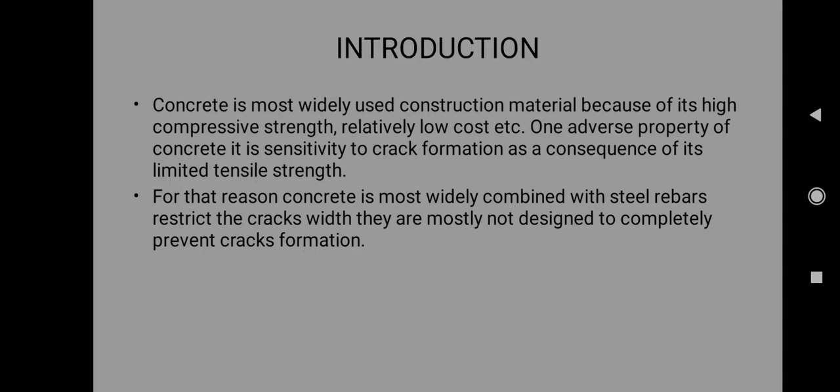Today I will discuss self-healing bacterial concrete. Concrete is the most widely used construction material because of its high compressive strength and relatively low cost. For that reason, concrete is most widely combined with steel rebars, which restrict the cracks but are mostly not designed to completely prevent crack formation.

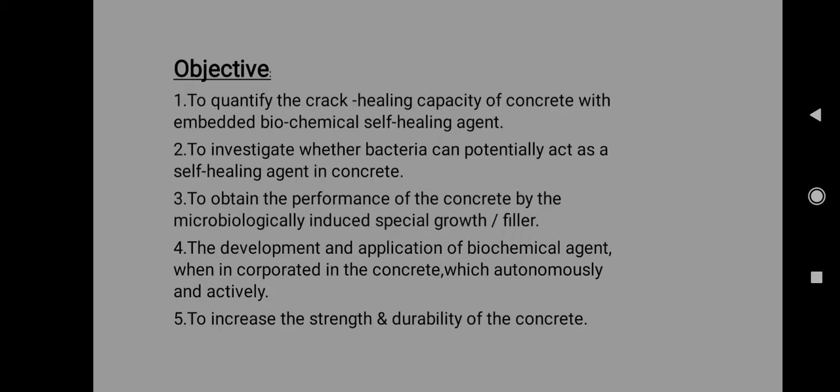The aim is to quantify the crack healing capacity of concrete with an embedded biochemical self-healing agent, and to investigate whether bacteria can potentially act as a self-healing agent in concrete. The development and application of a biochemical agent, when incorporated in concrete, autonomously and actively increases the strength and durability of concrete.

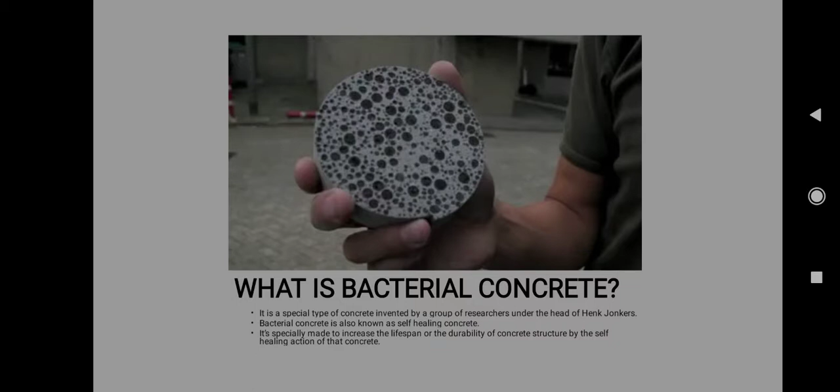What is bacterial concrete? It is a special type of concrete invented by a group of researchers under the head of Henk Jonkers. Bacterial concrete is also known as self-healing concrete. It's specially made to increase the lifespan or the durability of concrete structures by the self-healing action of that concrete. There are various bacteria used in the concrete, such as Bacillus pasteurii, Bacillus subtilis, etc.

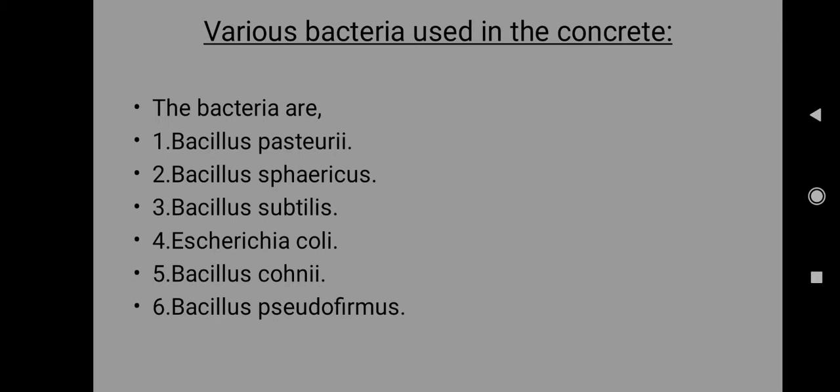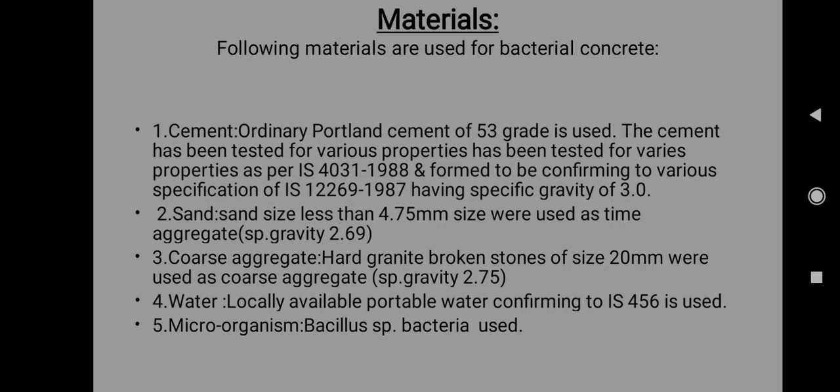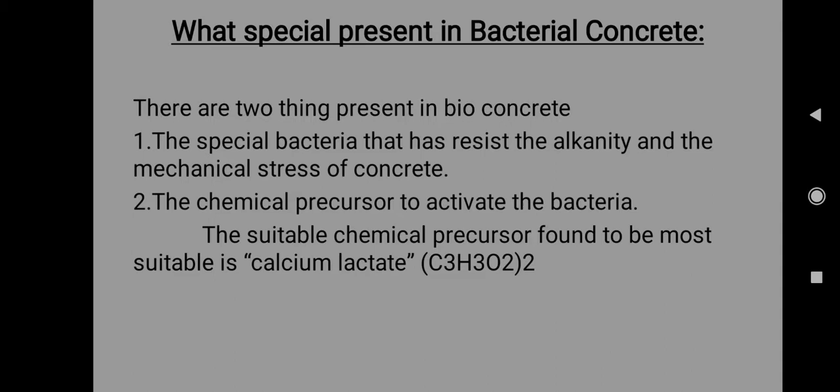The following materials are used for bacterial concrete: cement, sand, coarse aggregate, water, and microorganisms. What is special in bacterial concrete? There are two things present in bioconcrete: the special bacteria that resist the alkalinity and the mechanical stress of concrete, and the suitable chemical precursor, found to be most suitable, which is calcium lactate.

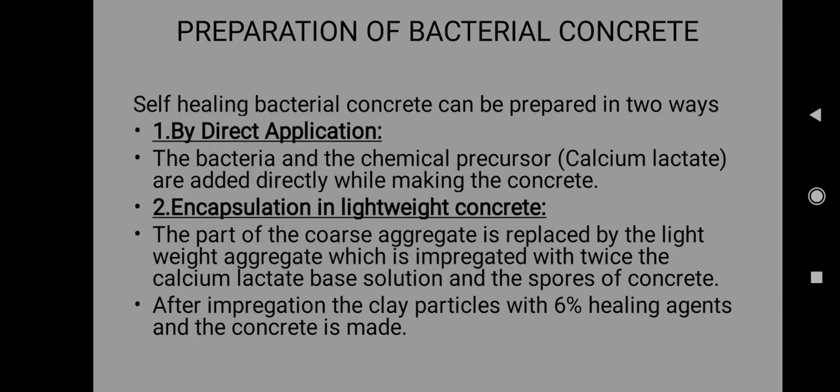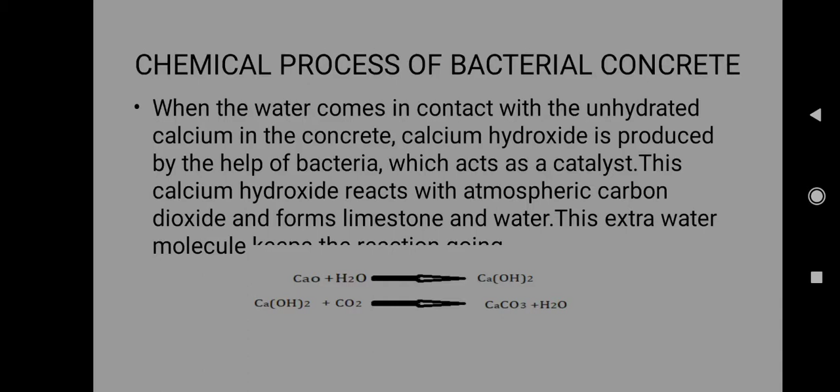Preparation of bacterial concrete. Self-healing bacterial concrete can be prepared in two ways: by direct application, and by encapsulation in lightweight concrete. Chemical process of bacterial concrete: when water comes in contact with the unhydrated calcium in the concrete, calcium hydroxide is produced with the help of bacteria, which act as a catalyst. This calcium hydroxide reacts with atmospheric carbon dioxide and forms limestone and water.

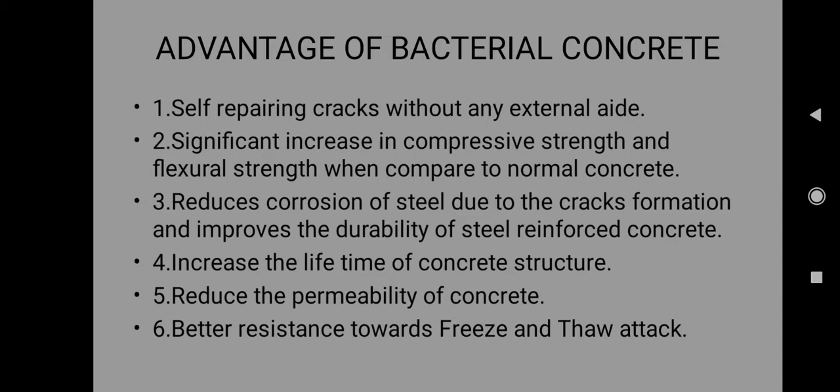Advantages of bacterial concrete: self-repairing cracks without any external aid, significant increase in compressive strength and flexural strength compared to normal concrete, reduced permeability of concrete, and better resistance towards freeze and thaw attack.

Disadvantages of bacterial concrete: the cost of bacterial concrete is double that of conventional concrete. Growth of bacteria is not good in every atmosphere and media. For the mix design of concrete with bacteria, there is no IS code or other code available.

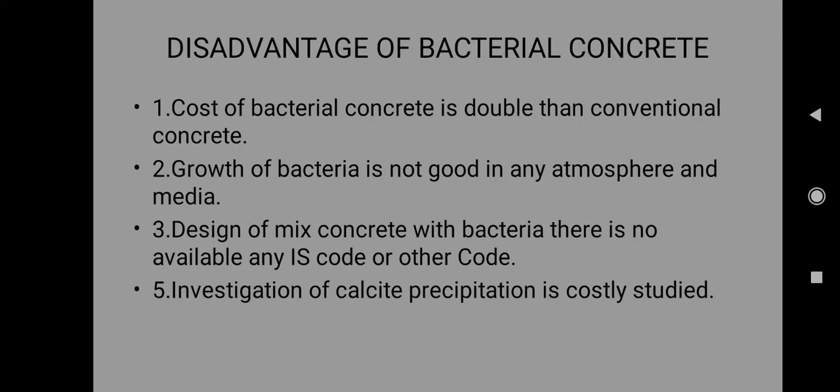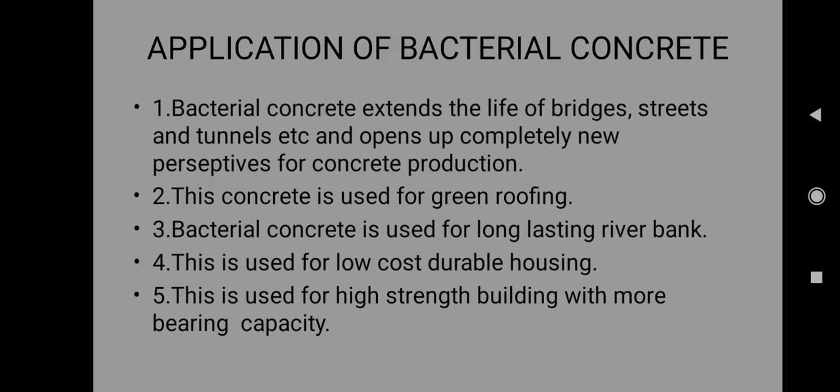Applications of bacterial concrete. Bacterial concrete extends the life of bridges and tunnels. This concrete is used for green roofing. Bacterial concrete is used for long-lasting river banks. It is used for low-cost durable housing, and for high-strength buildings with more bearing capacity.

Future scope of bacterial concrete: constructing low maintenance cost and high strength structures. The service life of structures is increased. This concrete can be used as a replacement for conventional concrete.